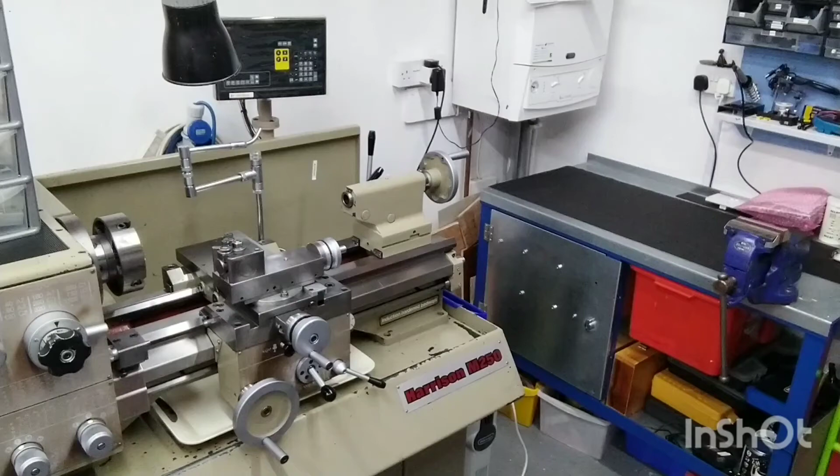It's Carl. Just having a nice brew out of my brand new lovely cup. Wild cinnamon and apple. Very nice.

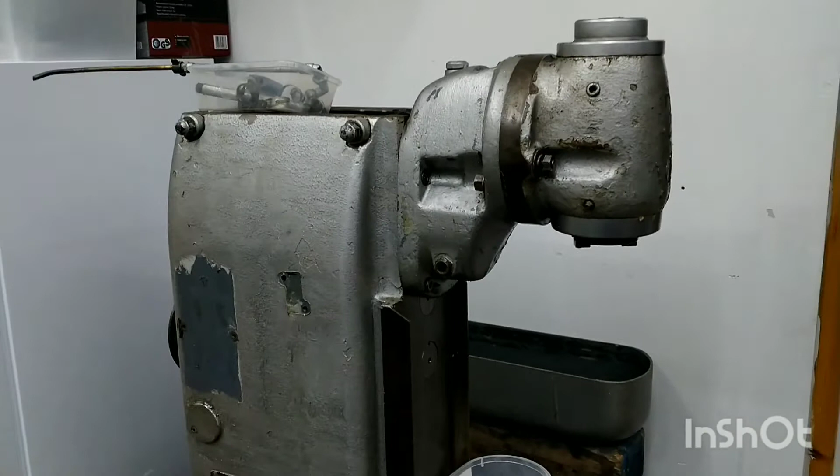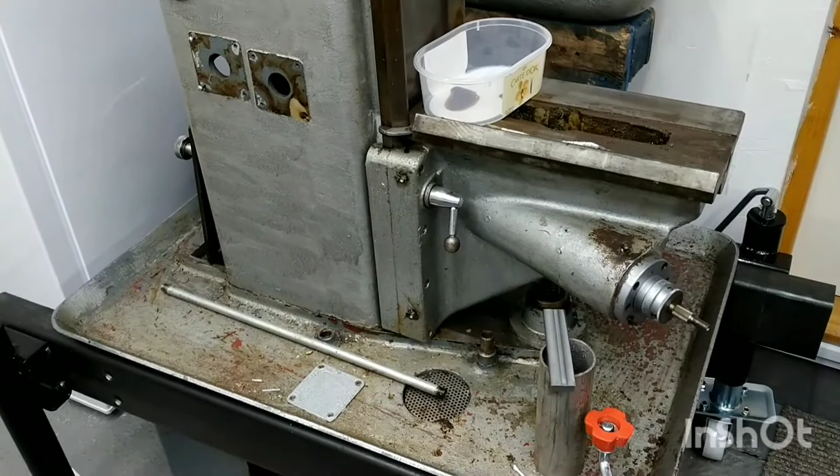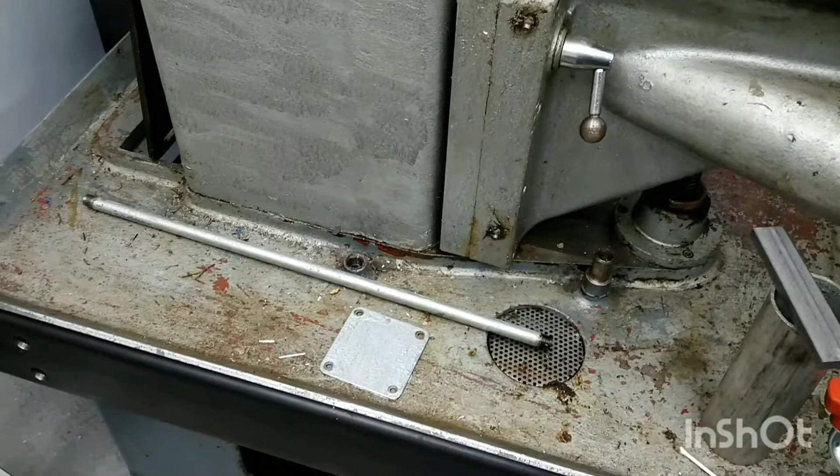So what I've been doing today is doing some preliminary work on dismantling further the milling machine, and I want to show you now some of the bits and pieces that I'm going to be working on and some of the vagaries of this 50-odd-year-old beast. So what I've just done here is I've taken off the coolant pipe. You can see a piece of it down there, and it's just brass with BSP thread run into the ends and then screwed into the various components.

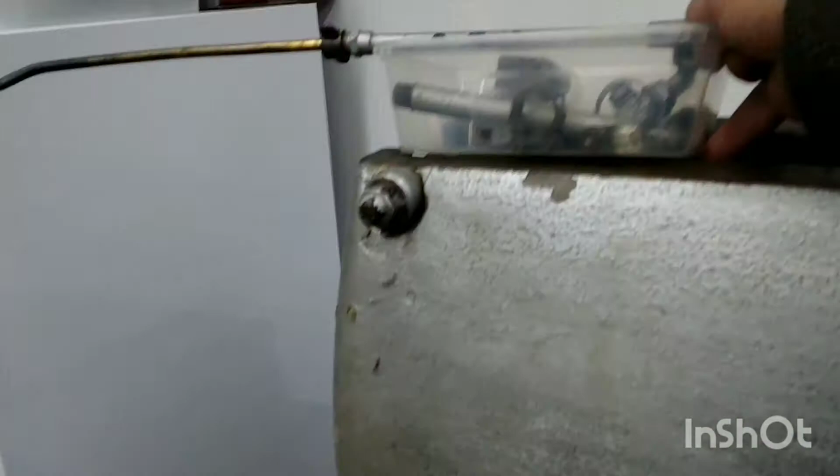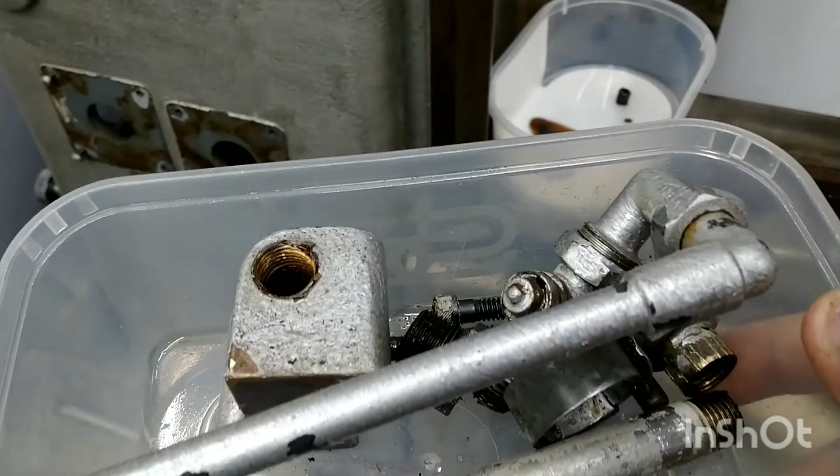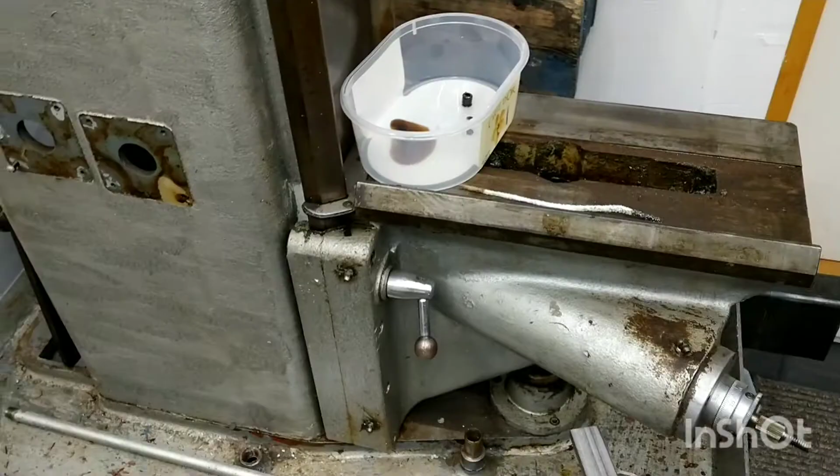So here we've got a box with lots of bits in it. That brass block fits onto, well, you can see where it goes there in the shoddy paint job that's on this thing, and that brass block has threaded into it this quarter turn valve that you can see here, and various other bits and pieces screwed together to make up the coolant pipe that runs up the side and then feeds onto the work table. So we'll put that over here for the time being.

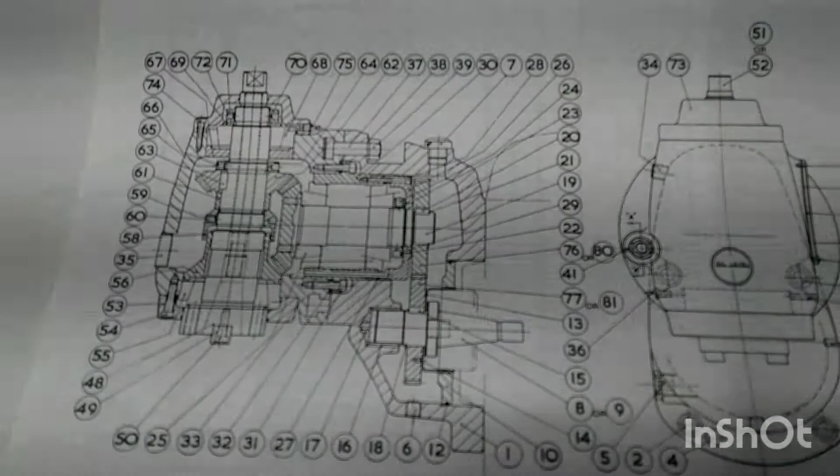Now I just want to show you this drawing here. This is the manual that I think I've shown you before, and I've just been doing some preliminary work. Here's my first best scriber, second best pointer. I've just removed this 8th BSP plug here from the base of the vertical head because I'm going to take that off next. It's the next big assembly that I want to remove.

So here is the vertical attachment. Handheld again, so the usual disclaimer.

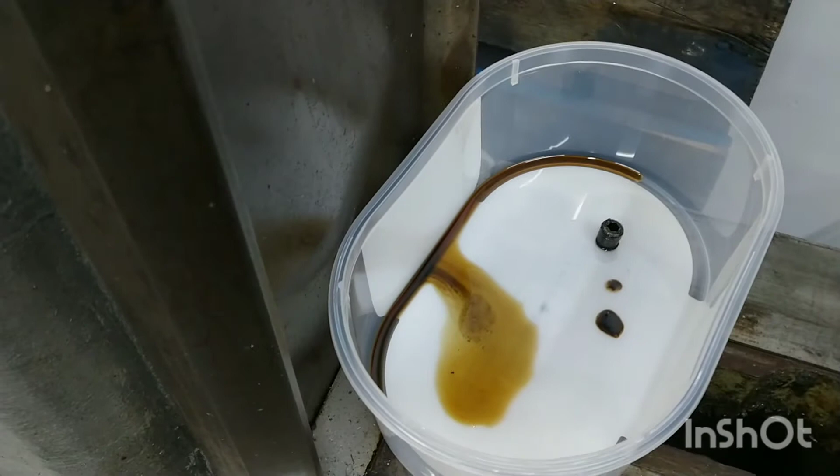So as I said, I have removed the offending 8th BSP oil plug from the base of the attachment and drained all the oil out. That's how much was in it. Not very much at all. Now that's supposed to be Shell Vitrea 27, which according to my research has been replaced by a Shell ISO 37, Tellus 37. Vitrea is a pre-ISO designation.

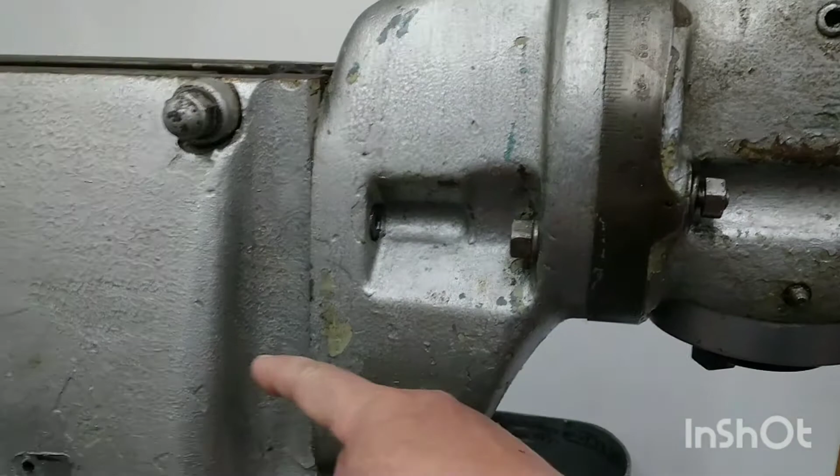Now that's supposed to be an anti-wear oil, and it smells like a gear oil to me, and it looks a lot thicker than I would imagine a 37 to be, but you know, if that's what it's supposed to be, then I guess that's it. So inside this part here, there is basically just a geared transfer from the driving feature of the spindle of the machine proper up to here, to where we have then a set of bevel gears in here, and I'll show you that on the drawing in a minute.

So I think I'm going to have to use the engine crane to get this off, much as I dislike using it in here. This is going to be a heavy lump, it's cast, and there's a lot of gearing and bearings and things like that inside it, so I don't fancy my chances.

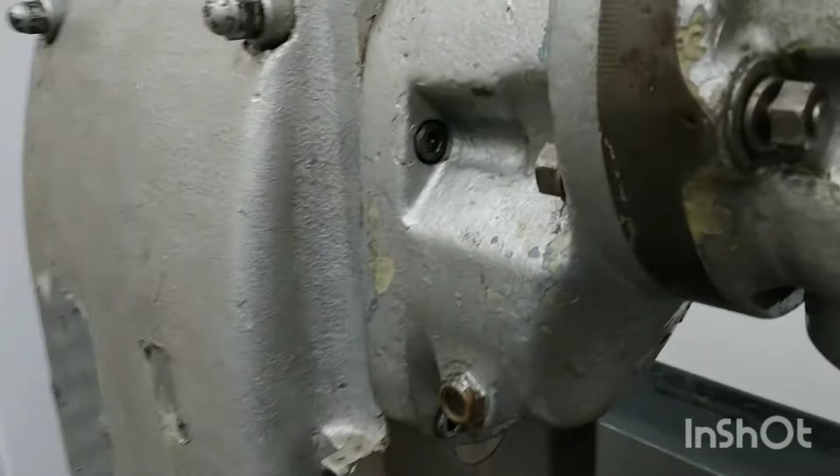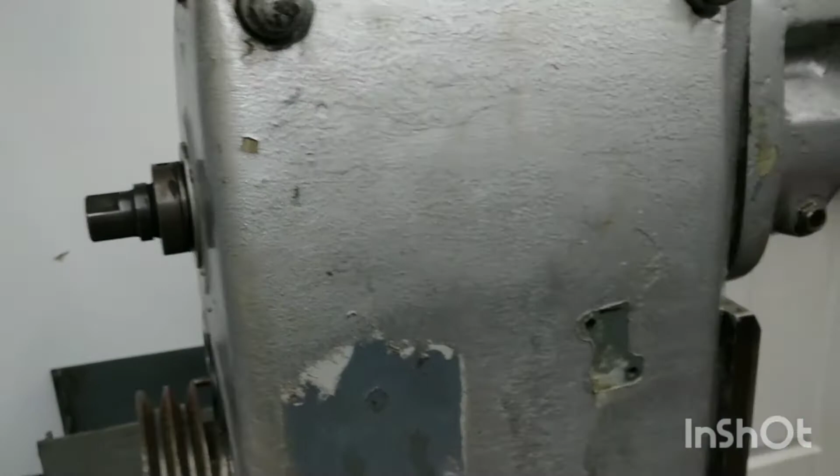You can see here, on each side there's two SHCS UNC screws, there's two on the other side. Take those two out and then remove this drawbar at the rear here, which is only hand tight at the moment, and then the unit itself, the vertical head, should pull off the ISO 30 taper that's in the spindle in the driving feature, and then we can get that off.

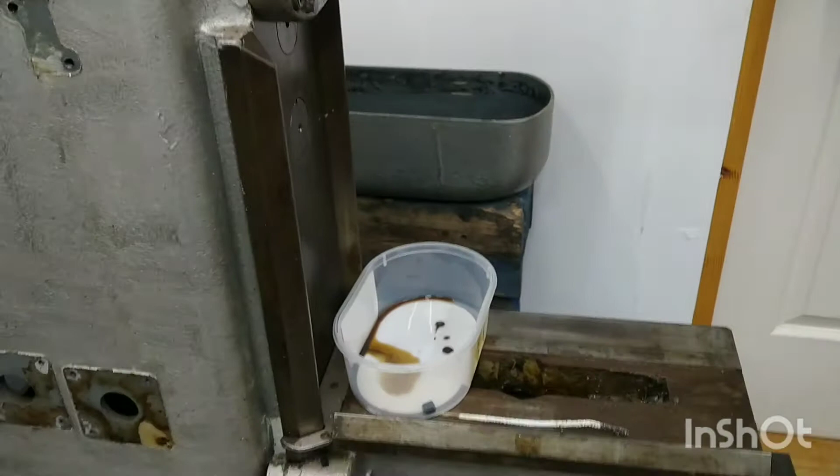Now as I say, I'm going to use the engine crane to do that because I don't really want to drop it onto the ways, which I know they don't look great on the knee there, but it's mostly cosmetic. I think that's sort of the state of them at the minute. So I'll show you the drawing now, and you can see how this thing works.

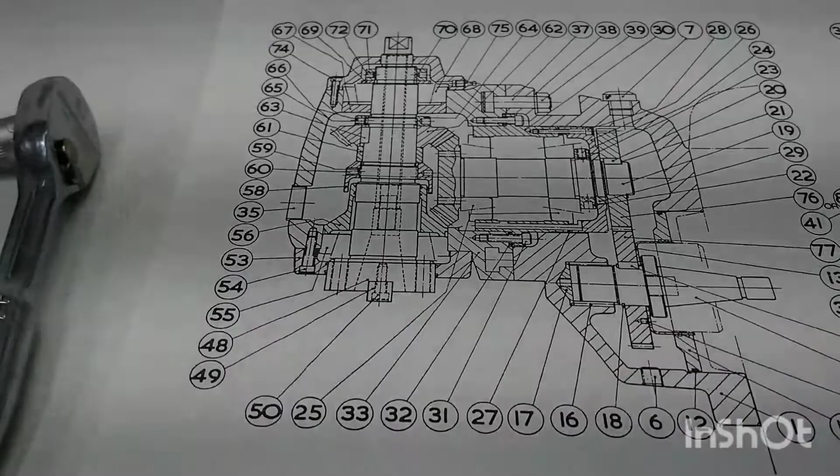So here is the drawing that I have of the vertical attachment. Excuse the quarter drive ratchet handle there, I just left it in for authenticity. So you can see here what I was talking about. There's the plug that I removed, the 1/8 BSP plug, to drain the oil out of the unit, out of this part of the unit at any rate.

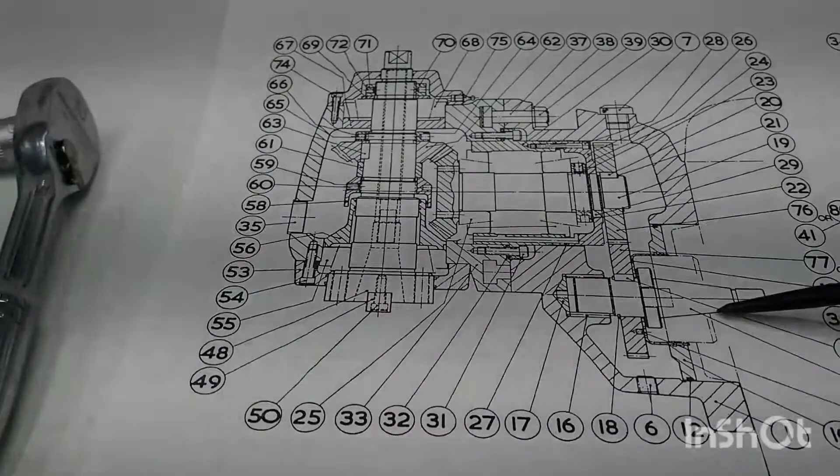So we have on the right hand side here this stub shaft, which has an ISO 30 feature on it that goes into the driving feature of the spindle. And then we have these two gears to transfer the drive up to this level, which then goes into this portion of the unit, which is bolted on with these T-bolts that allow you to swivel the head itself.

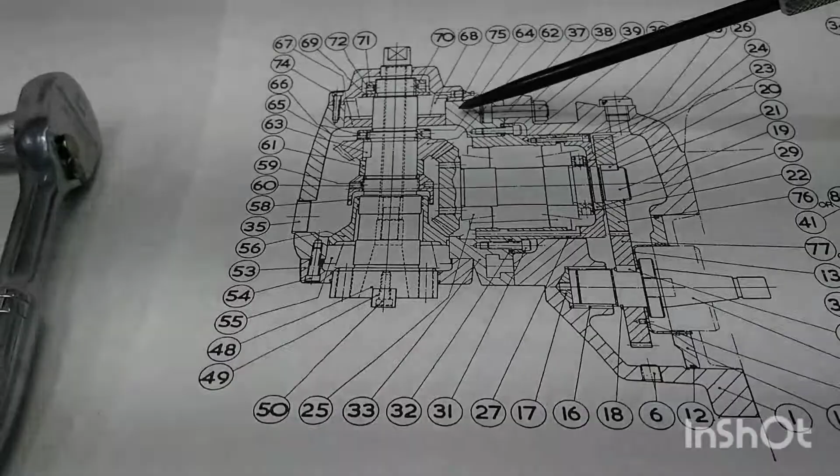And there's a dowel which you use to maintain tram if you do move it away from 90 degrees to some other angle, you can reposition it with a dowel. I'll show you that in a minute.

So these two gears here obviously then drive up through this shaft, and then you've got these bevels or mitre arrangement, and then in here are the bearings for the spindle itself, the milling spindle, which has an ISO 30 feature in it, and this drawbar here, a short drawbar, which is to pull in the chuck or the collet or whatever you fit into here to drive the tool.

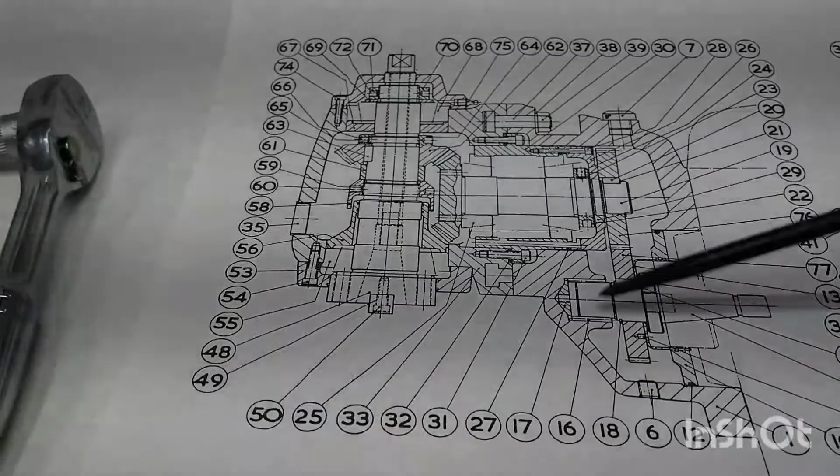So these gears in the low speed version, they're both 51 teeth, so it gives a one-to-one drive through here. And then in the high speed version, that gives an increased drive, so the bottom one is a 66 tooth and the top one is a 36 tooth, so it gears up the drive basically to increase the speed. Now I'm just going to give you some figures for what that is.

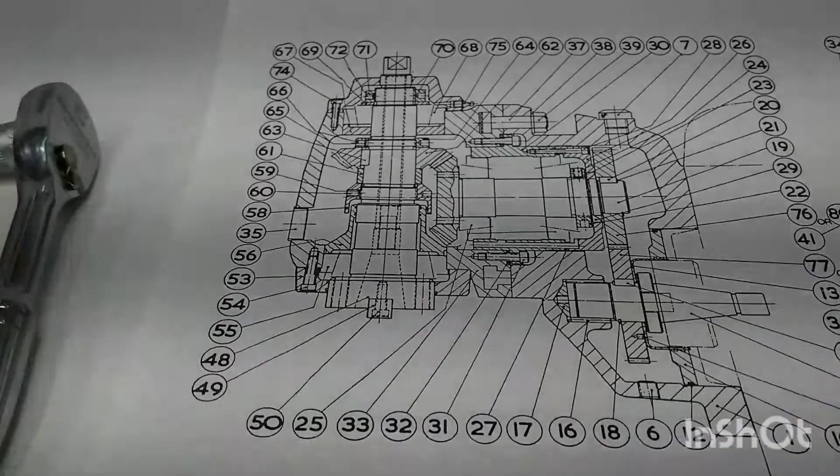Just give me one second. Yeah, so the high speed is about 120 to 2750 RPM, and the low speed is something like 82 to 1850, I believe, is the difference in speeds for that. So we'll go back to the head now, and we'll have a look at some more features, and I'll show you the dowel.

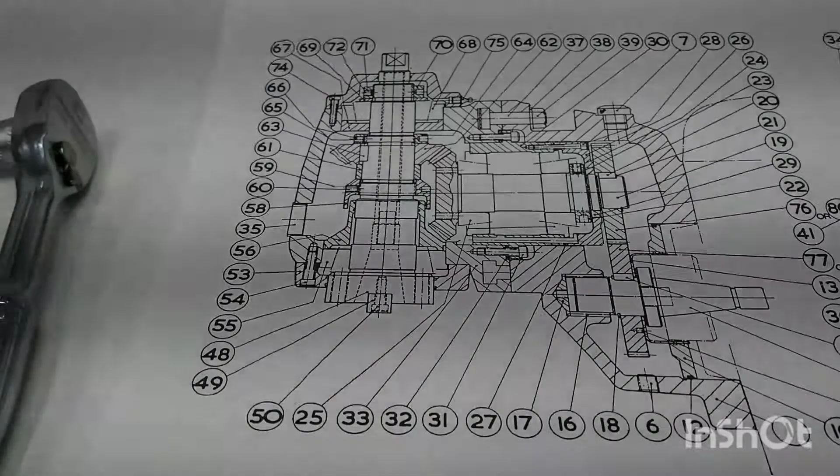So this is the dowel I was just referring to. It's a tapered pin with a thread on the end and a nut, and kind of counterintuitively, if you want to remove this, you tighten this nut up and it pulls the pin out, and I'll show you that now. There is some damage on this which I'll give you a peek at.

So I'll just get my... I've drunk my brew, that's no good.

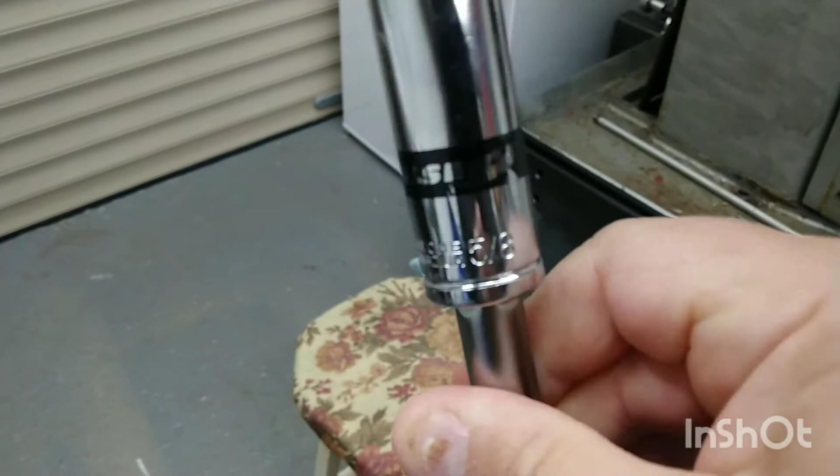Let's get this, what have we got here. Yeah, what size is that? Just show you, 5/8 AF. So we'll get that on there. Now I've had this out already, so it should come out relatively easily if I turn it the right way. Right, I think it's going to pop out now. No, let's keep going, give it a go. Yep, there we go, that's got it loose.

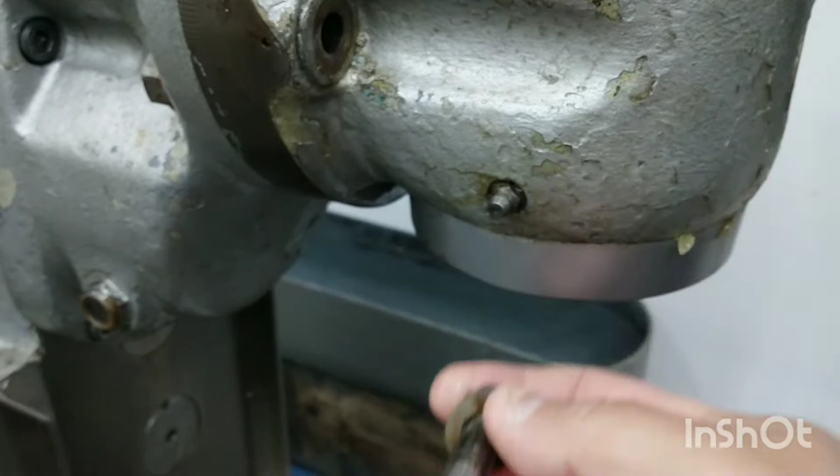Right, so there you go, one taper pin, which doesn't seem to have any scoring or damage on it, despite that line that you can see there. I think that's just in the grease. Now, what you're supposed to do with this is when you put it back in, you're meant to undo the nut so that it's right at the top and protects the threads, and then tap it back into engagement.

And I think someone's just been hitting the thread. When I first saw this, I thought someone had tried to pin it, to lock it in some way, but I don't think that's the case. I think someone's just been a bit too free with the tapping stick. So we'll have to clean that up before that goes back together.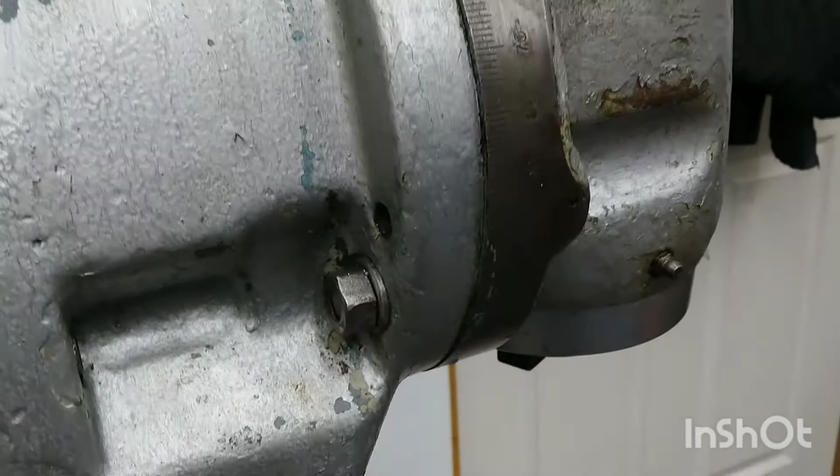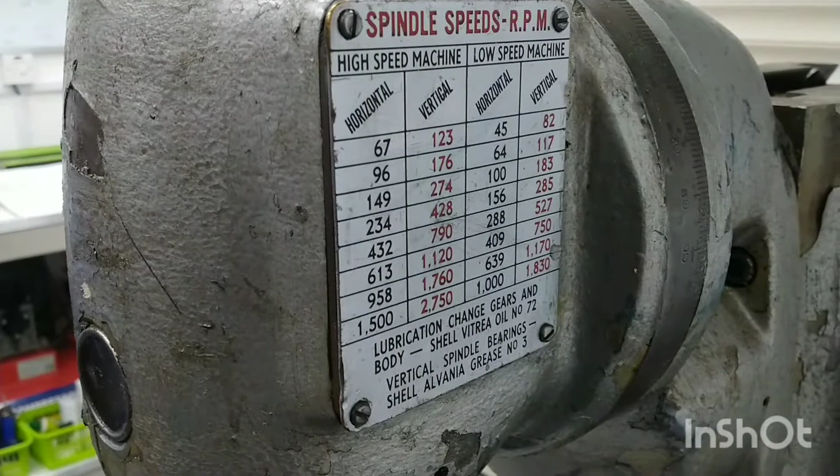So these are the T-bolts I was talking about that allow this head to swivel round once you've removed the taper pin, and there's graduations on here. You can move it, I think it's 45 degrees either side of vertical, and so that allows you to swivel it around. And then we've got a plaque on the side here that gives the speeds for if it's a high speed or a low speed machine, or head I should say.

I don't actually know what this is. And when I take it apart and look at the gears in the transfer portion, the transfer gearbox if you like, in here, that transfers the drive from the driving feature up into the bevels, I'll be able to tell you what that is more definitively.

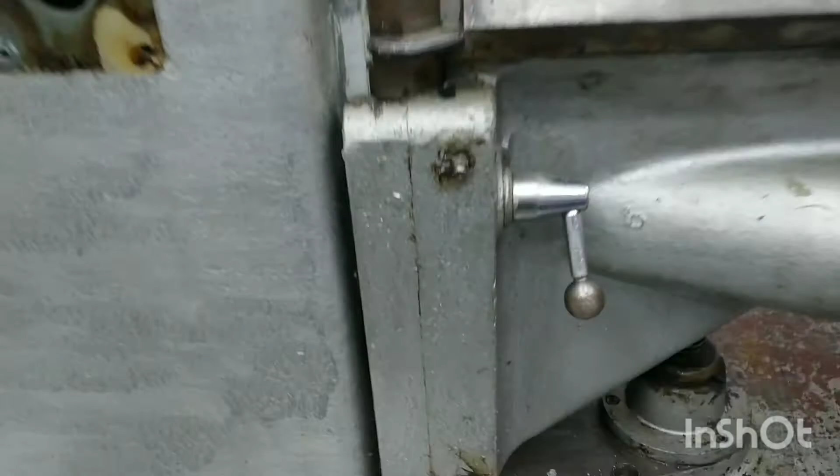So I'm going to show you some more bits and pieces now. We'll have a look at the knee, and we'll have a look at the knee lead screw and the lead nut and the nut housing. So this knee is attached onto the vertical guides or vertical ways here by this clamping arrangement.

Now, I've read up on this, and there's not much information online from other users about these machines. So I'm hoping this is going to become a bit of a repository of information, and my mistakes will help other people to refurbish these machines.

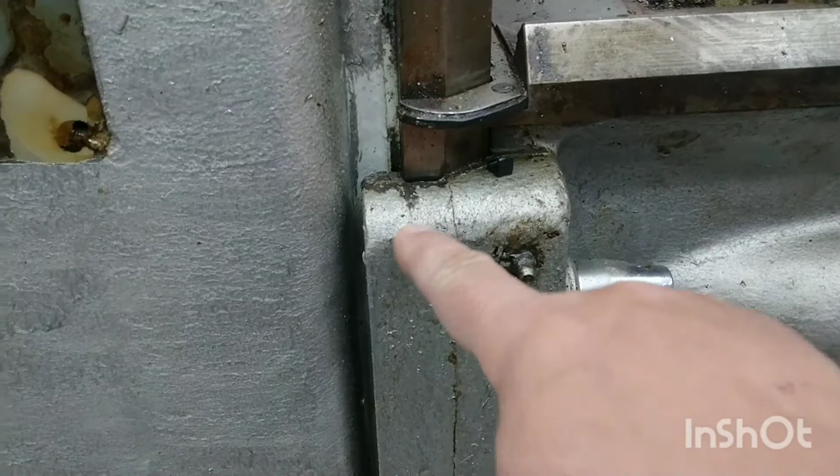This clamping arrangement here, which you can see at the front, has 4 SHCS holding that on, and then you've got the lock here as well. This doesn't have any gib strip in it at all, and I'm told, or I've read, that there are shims in this gap to set up the clearance or the fit between the clamp and the ways there, or the running faces here.

And I'm kind of loath to take this apart, but I think I'm going to have to get this off just to clean it up really, and even just to paint it. And I think nothing ventured, nothing gained. I think I'm going to try and split this apart and take this off. If it's shimmed in there, then it might be difficult to get the clearances right, but you know, there are ways and means of going about these things, and I think we'll have a go at it.

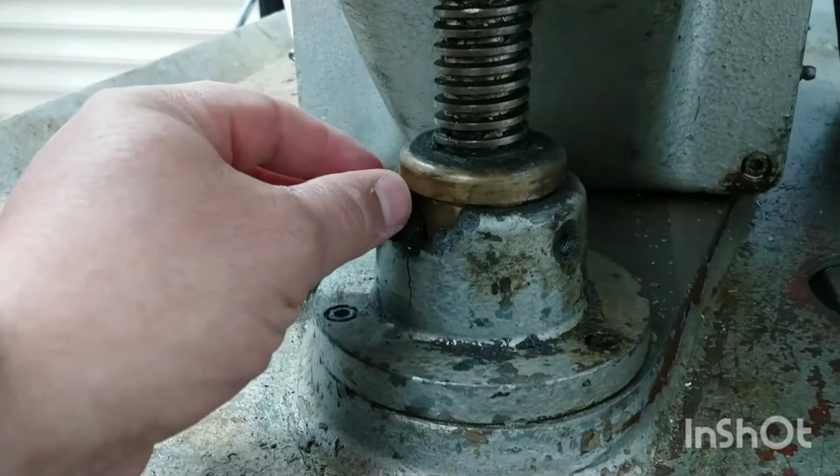So the thing I want to show you now is one of the parts I'm going to have to manufacture for this machine on the lathe, the lead nut housing. As you can see, it's cast iron, and a fairly substantial crack here has led to this damage. So there was a lubrication nipple in here, and obviously the crack's propagated from the threads. They've been the stress raiser that's caused this crack.

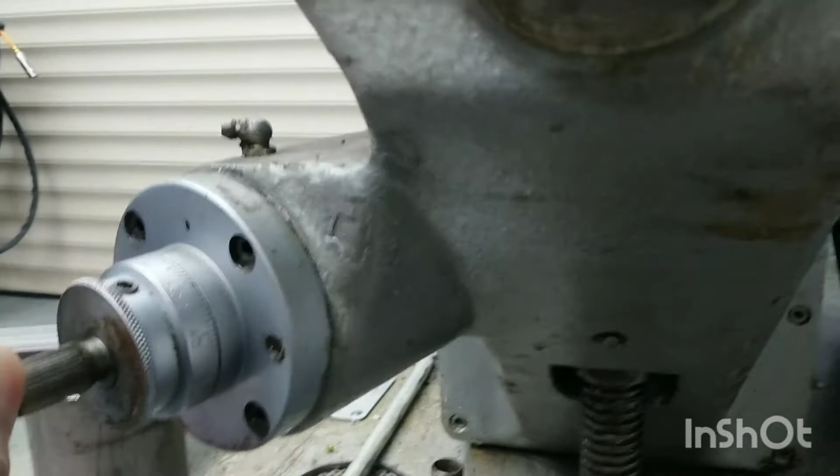So that's got to come off and get measured up and have a new one manufactured. There is another crack in it as well, around 180 round from this one. So that lead screw has to come out, and the operating mechanism with the skew gears inside here, inside the knee. You can see how filthy that is in there. It's just years of basically grease and swarf and other detritus that's managed to work its way into there, so that's all got to come apart as well.

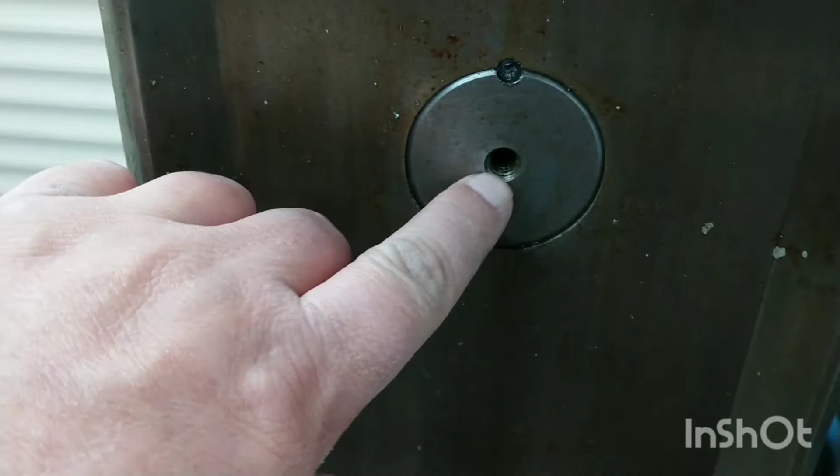And another thing I want to do is, I kind of was going to leave the gearbox alone, but I am going to strip it down and replace all the bearings. And I've got these caps here. You can see that there's a thread in that hole, and then there's a locking grub screw on the periphery, so I can actually thread something into there to pull these caps out, which are the bearing caps. Inside there, there's a bearing for one of the shafts in the gearbox, and I'm going to make a simple puller to get these out on the lathe.

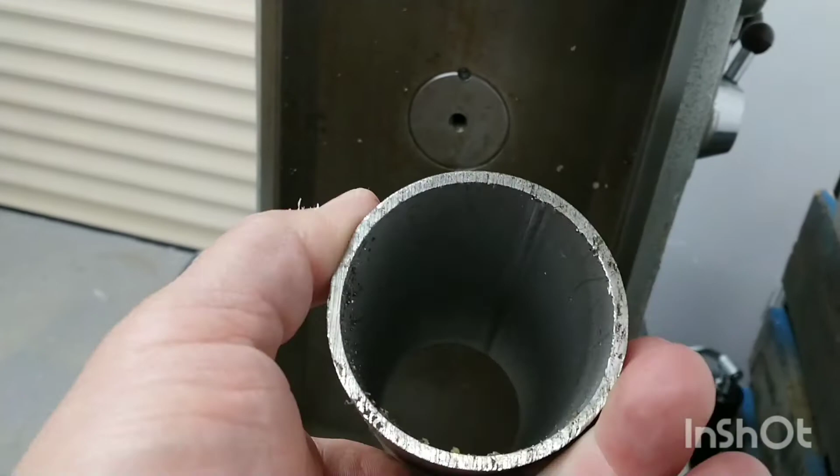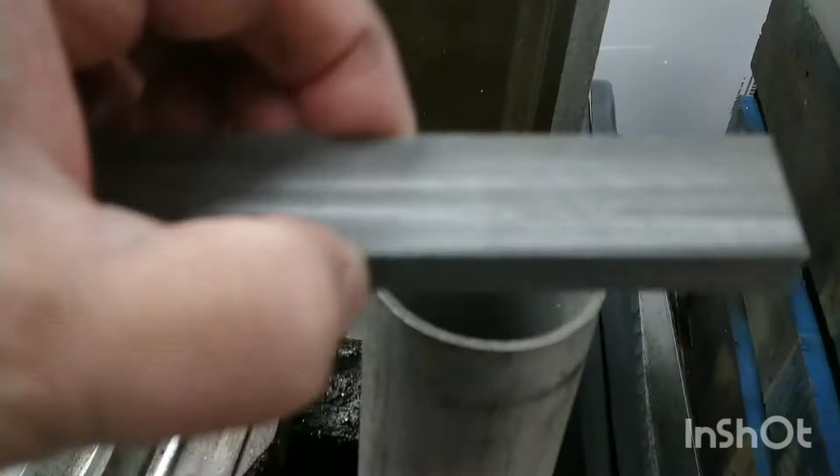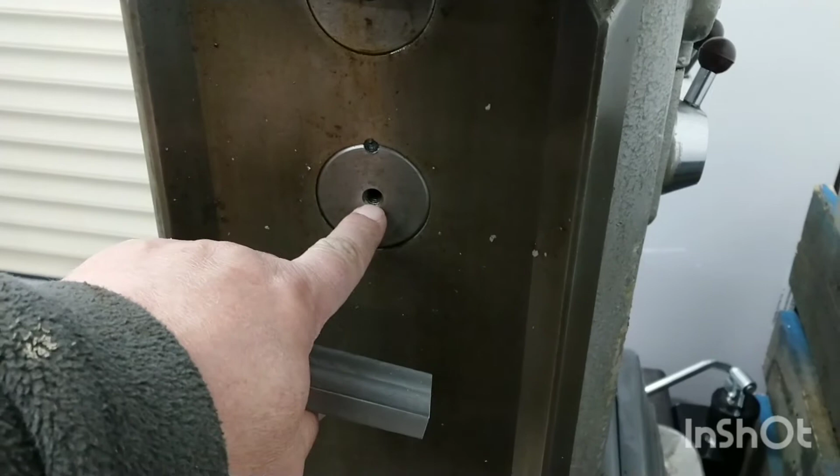So basically what I've got here, I'll show you now, is some nominal bore hydraulic pipe which fits over the cap, and I can cut a piece of that, and then take a piece of flat bar, weld it across there, and then I'll drill a hole in it, put a piece of threaded rod through with a machined end with the thread that's in there. I'm not sure what it is. It's a UNC. I think it's probably quarter UNC or maybe slightly bigger. And then we'll be able to make a puller to get that out.

It does seem a little bit overkill. I know you'd probably say, why don't you use a big socket? I haven't got a socket big enough, but I have got a lathe and a TIG welder, so I can make something up. Which makes all the difference, actually, I think. Being able to make just ad hoc one-off tools to do jobs like this, it's just a little bit more professional, and it makes the job go much more smoothly, I think.

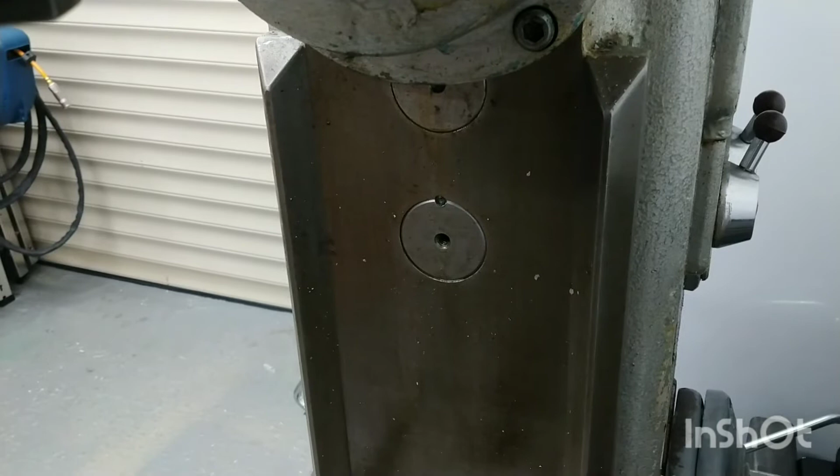You can see where we're at today, or it is a different day. We've now got the engine crane in position to lift the vertical head off the machine. I got it slung here with a couple of 1 ton strops, overkill, but there you go. We've got one doubled up around it, the other one's basketed through and on the hook. So we're going to take the weight using the engine crane, the dreaded thing that I don't really like using in here because there isn't an awful lot of space, but I haven't got any choice to get this off.

We'll take a little bit of weight off this and we'll take the 4 SHCS screws out and we'll get this off. So now you've seen the arrangement, I'll bring you in a bit closer and we'll get this beast off. So here we are, slung as I mentioned to you before, on the engine crane. This sling's twice round and then this one's through the eyes and then into the hook.

So this is held on with 4 7/16 UNC SHCS screws. I've taken the top one on each side out already, so that obviously once I've got the sling on I can't actually access them, so I've taken them out prior to slinging it up. So it's now being held on by these 2 at the bottom, the 2 7/16, and also by the drawbar that's going through into the driving feature, the ISO 30 feature in the back of the transfer box.

So here we go, there's a 5/16 AF socketed Allen key. We'll get these 2 7/16 out of the bottom of the unit itself, the vertical head. Put them in there, get this one out. There is some kind of a dowel here in this position, hard to see I know, but I'll show you it shortly. We'll get this one out and then we'll try and see if we can get any movement on this. Now there should not be anything holding it now. I can see there's a slight gap starting to open up at the side.

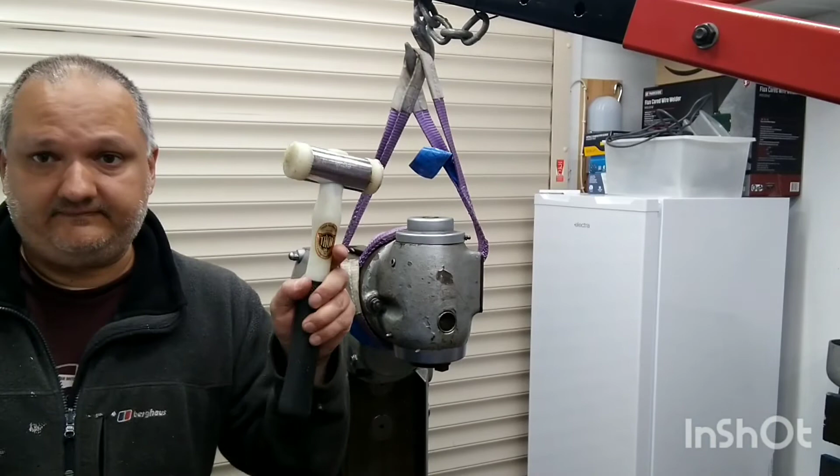Let's just see if we can get any movement with the old Thor. Yes, I am Thor, I better put some cream on it.

Okay, so, right, gap's opening up, so it has definitely opened up there. There's a little bit of weight on this, not much. Oh, I've got some movement there, that's good. That means something, doesn't it? Right, let's undo the drawbar and see if this is going to come off. So that's the drawbar out. Put that somewhere safe, we'll put it on the bench for now.

Right, I'm going to give this a tap. Right, that's definitely pulling away from the driving feature. So I don't want this to fall off onto the ways. Right, I'm going to show you what's in here now, because there's definitely a locating feature there as well. So I'm going to bring you in on the small tripod. That's what we'll do next.

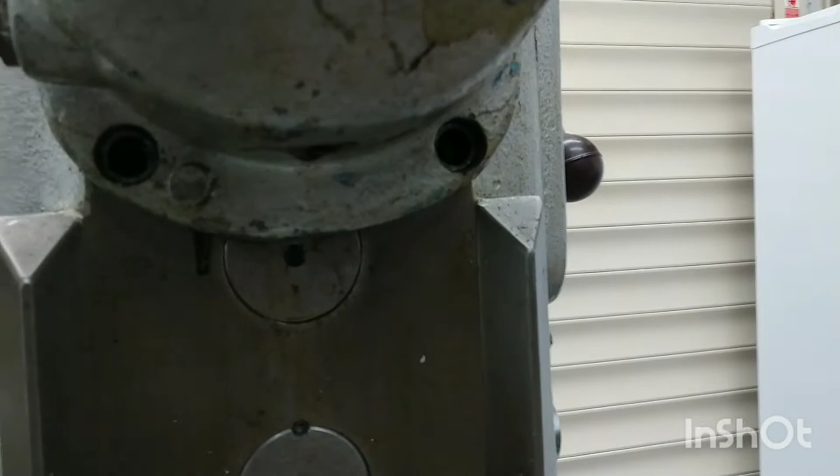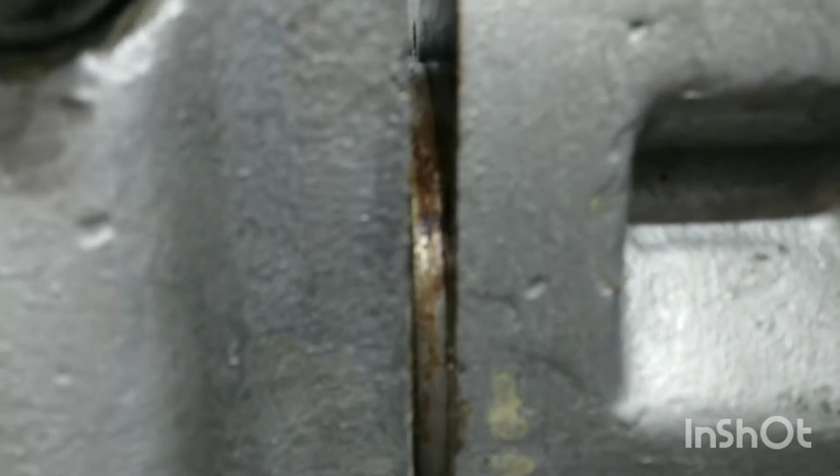So that's me brought you in on the handheld. You can see there the dowel, or whatever it is I was talking about. It looks like it could be a dowel. You can see where I've removed those 2 7/16 UNC bolts. Now coming around the side, you can see the gap is starting to open up and the head's coming off. Inside there is a locating feature. You can see that there, that ring.

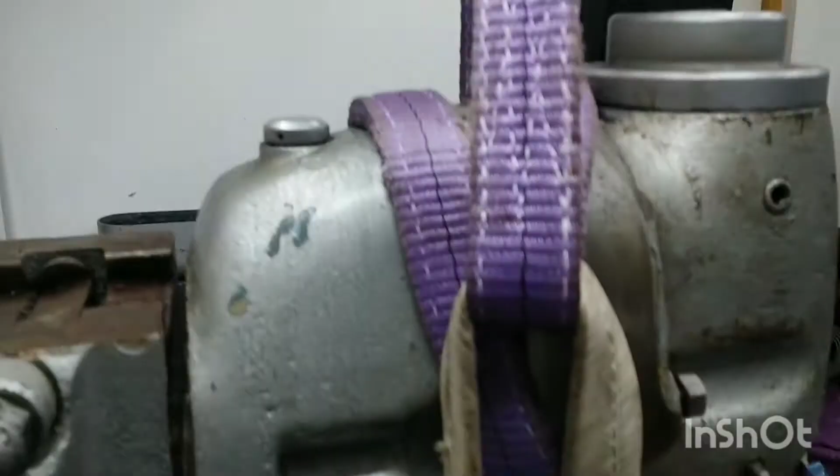So we'll carry on. We'll get you back on the tripod because I want both hands free for taking this off. There is some load on the sling. I don't want to load it too much because I don't want to jam it up on the locating feature or on the driving feature. So I'm just going to leave it like that at the moment. And this is slung in such a way, the way this is doubled round, that the vertical head won't slide out of that slinging arrangement. But once I've got this off, I'll get it down onto the deck as soon as I can.

But I'll transfer you back to the big tripod, so I've got both hands free, and we'll carry on with the operation. Okay, that's you guys back on the big tripod again. So I'm now going to remove the vertical head away from the machine body, which may take some doing because this engine crane is perhaps not the most manoeuvrable of things. Right, this is starting to come off now.

I think I'm going to take a bit more weight. That's definitely moving. Yeah, I'm going to take some more weight on the crane, I think, because I really don't want that dropping onto those ways. So you can still see what I'm doing. I'll just get a bit of weight on the crane and also observe the head and see what it actually does when it's got a bit. Right. Yeah. Oh, yeah. We're off.

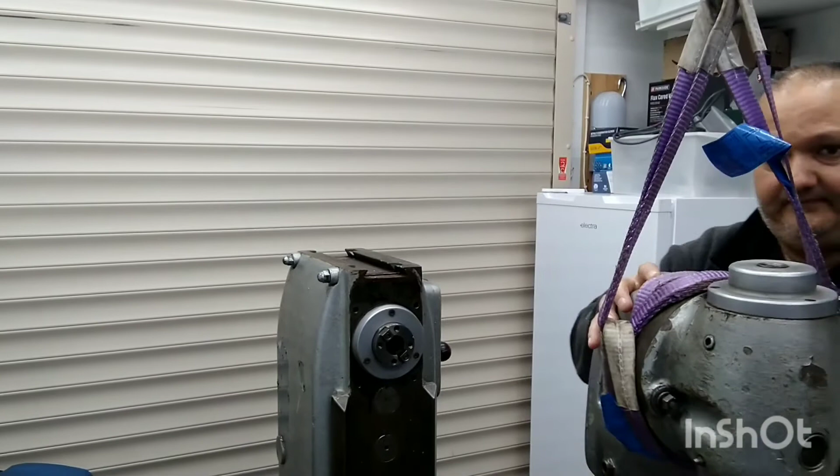Right. That's the ISO 30 taper just come out there now in the stub shaft. So I'm going to put you on the small... in fact, no, I'm not. I'm going to pull this back, get it out of the way of the machine, and then I can show you properly what we've got. That's actually quite nicely balanced. Quite pleased with that. Let's get it away from those ways, and then we'll have a look at what we've got with it suspended from the crane, because it's not going to go anywhere. Right. Okay, I'll put you on the small tripod and we'll have a look at what we've got.

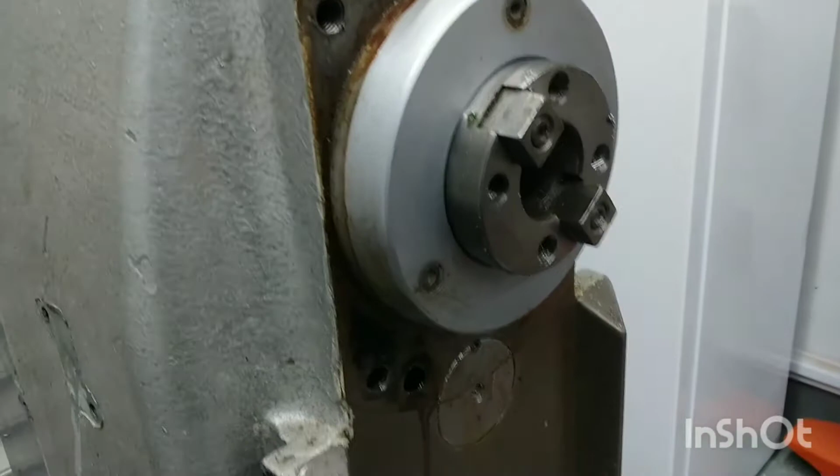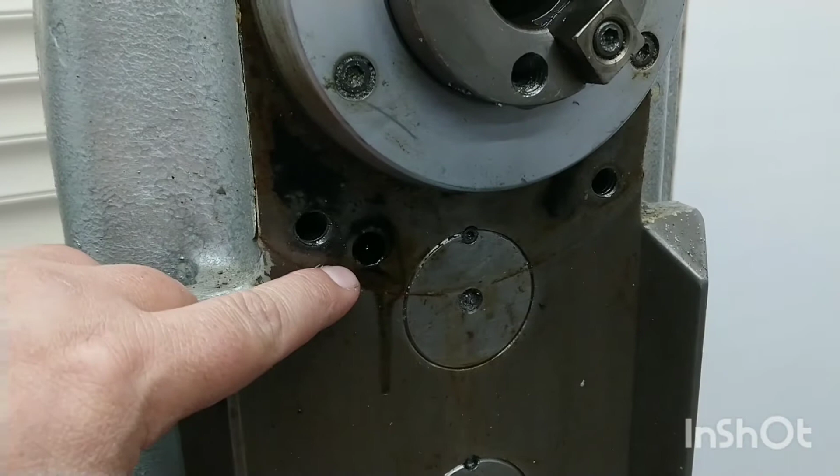Right, so that's you back on the small tripod and handheld. So here is the driving feature, the ISO 30 fitting, which would have the horizontal milling arbor fitted into it normally. And you can see here there's a locating hole where the dowel that I was talking about went into, and then you've got the four 7/16 UNC threaded holes that hold on the vertical head. And this is the locating feature I was talking about, which is actually the bearing cap for this end of the driving feature, for the horizontal side of things.

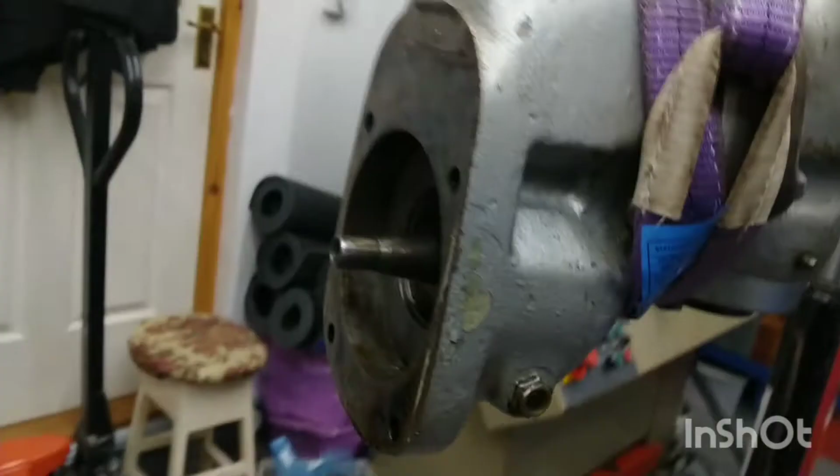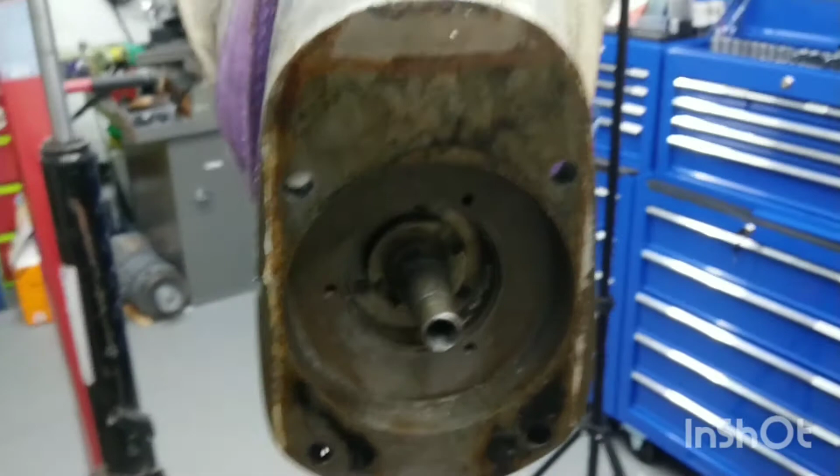So now we'll spin you around. We'll have a look at the vertical attachment. So that's nicely balanced on there. Actually, I'm quite pleased with that. I was a little bit worried that it was going to fall over or it was going to tip, but thankfully not. So if we go around the other side of the vertical attachment, okay, there's the mating face. This is where it locates onto the bearing housing, which is the locating feature on the driving side, the horizontal arbor side.

Here is the ISO 30 stub shaft that I talked about on the drawing, and that's not coming out. I think that's got a circlip or something on the other side of that stub shaft. Anyway, on the other side of that is a 51 tooth gear. So we'll get into this in more detail later on when we come to strip it down. But that's what we've got in there so far. We've got an ISO 30 stub shaft, and that engages on that ISO 30 driving feature.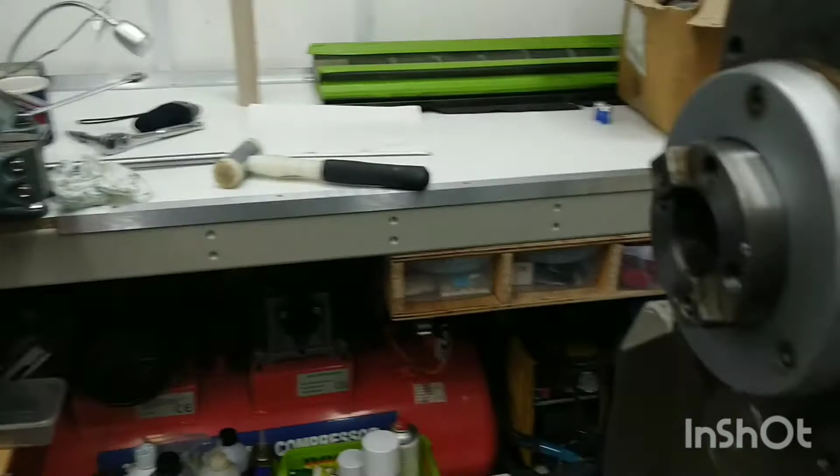So that was a lot less painful than I thought it was going to be, extracting that vertical head. So I'm really pleased I've got that off now, and I can start looking at the strip down of the gearbox, because you can see there this bearing cap here for the gearbox was partially obscured by the vertical head, so that had to come off before any further strip of the gearbox could take place.

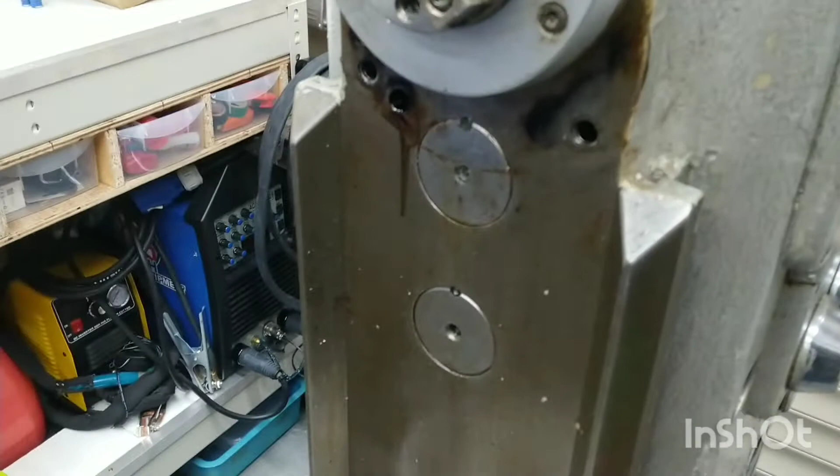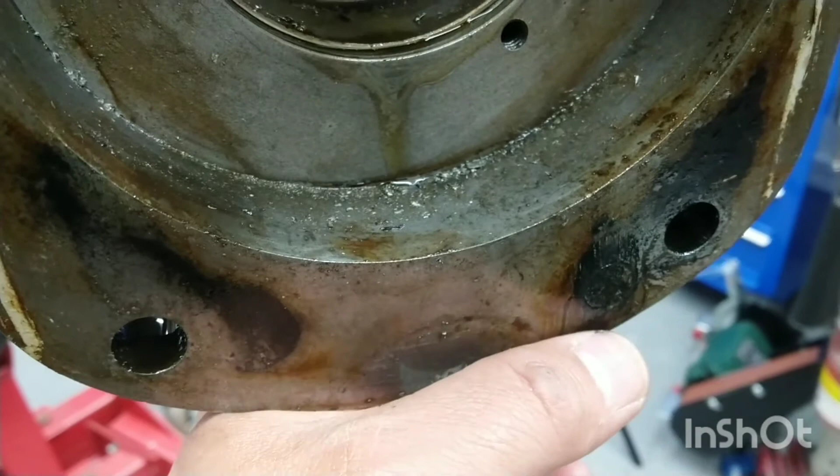And I'm just looking, actually, the dowel I was talking about is recessed. So I'm not too sure what's going on with that, because there is definitely a corresponding bore there for that dowel to engage with. So we'll maybe have to have a look at that as well at some point in the future when we start stripping down the vertical head and examining the parts inside it. See what's going on with that dowel. Right. That's a good job done. I'll now get this thing down to terra firma and get it housed in a nice box. Keep it out of the way until we get the chance to do some more work on it.

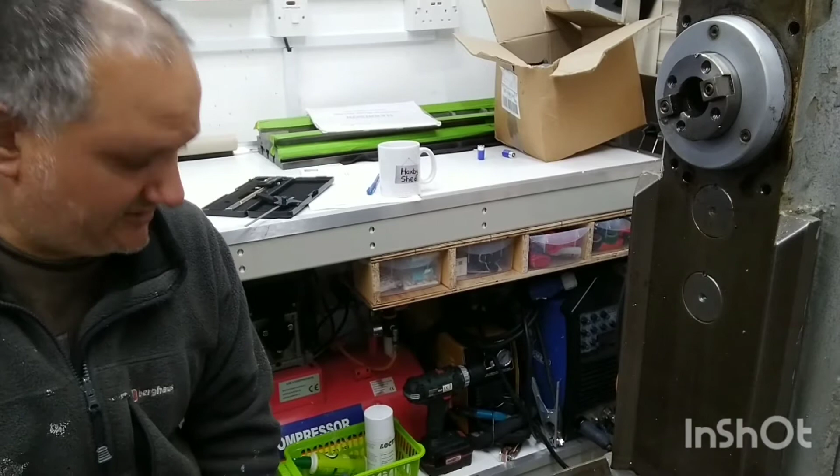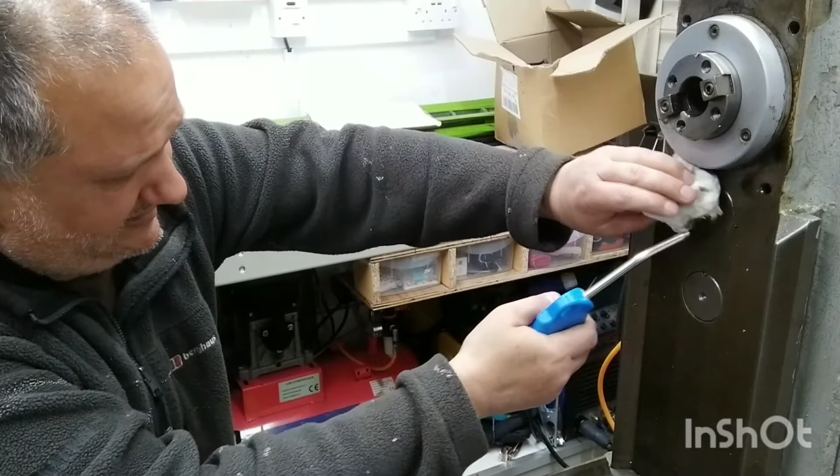So you find me just spending some time cleaning out the threads in these plugs so that I can get some measurements and get some dimensions to make a puller for them to get them out. So I've just been basically blowing them out with compressed air, because like everything else they're absolutely full of grease and swarf. I'm giving it a spray with some aerosol solvent as well.

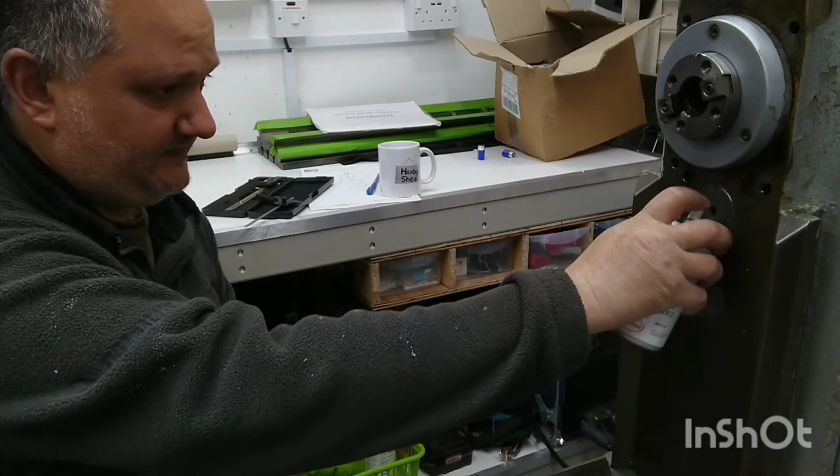Now, I spent a lot of time on the saddle and the table of this machine cleaning out all the grease, all the lubrication lines, the oil lines, cleaning out all the grease from them because they were absolutely chock-a-block with grease. So that was a long protracted process with pipe cleaners and blowing them out with compressed air, chasing them out with acetone or solvent. But in the end, I managed to get it all out.

So I'll have a look. I'll put a tap down these threads. As I said, they are 5/16 18 UNC. Everything on this machine is either UNF or UNC, so it's all unified. So that seems clear enough in there now. And let's try this one. Yeah, just getting all the swarf out of it, all the dirt and grease. Right, that's good.

So I'm just going to try and measure the depth of the thread in there pretty roughly, just using this little depth gauge. It doesn't have to be that accurate. It's only going to be for a puller, and let's use the level of accuracy that the task dictates. So that is 8mm of thread in there, and about the same on that one as well, I think. Yeah, 8mm of thread, which is okay. It'll get a good hold at that.

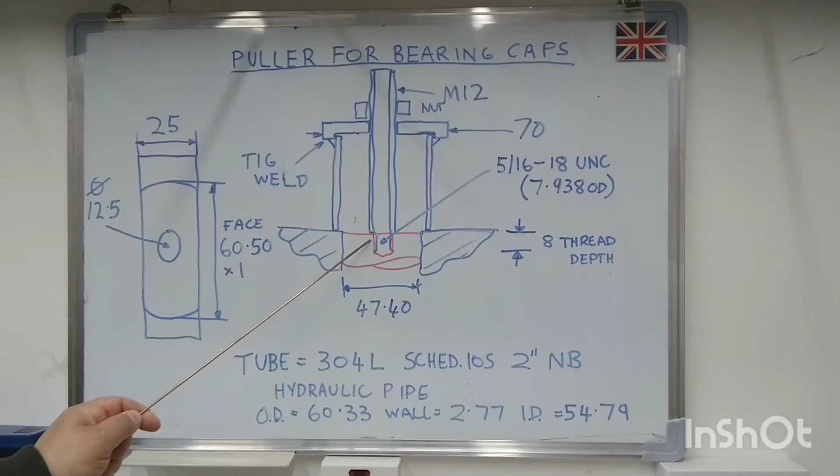So here is a rough sketch, very rough some might say, of the puller that I want to make to extract the bearing caps in my Harrison mill. So here's the bearing cap in red with the thread through the center of it, which is 5/16 18 UNC, and I took a slightly more accurate measurement of it than the one you saw me do, and it's 47.4mm in diameter. So what I want to do is to have a piece of tube like this with a bar welded across, a hole in the center of that bar, and then a piece of M12 threaded rod with the end turned down to 7.938, which is the major diameter of the 5/16 UNC thread.

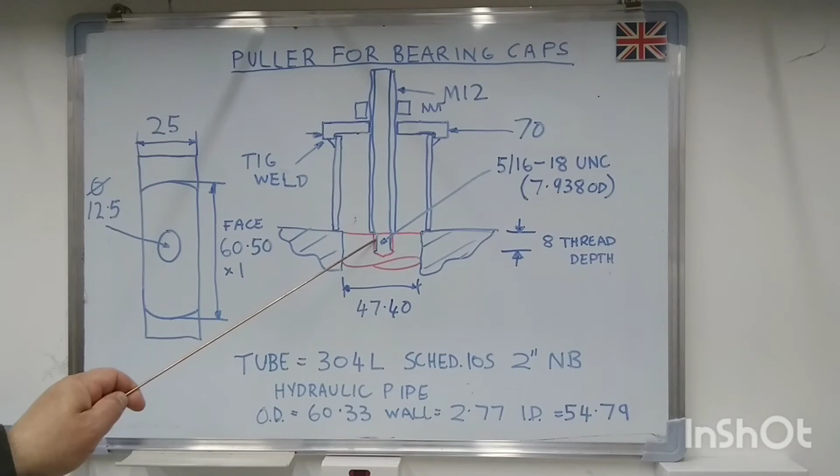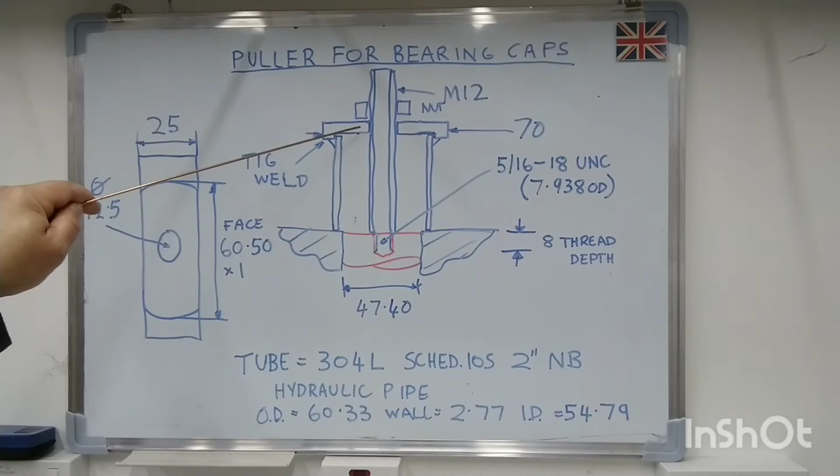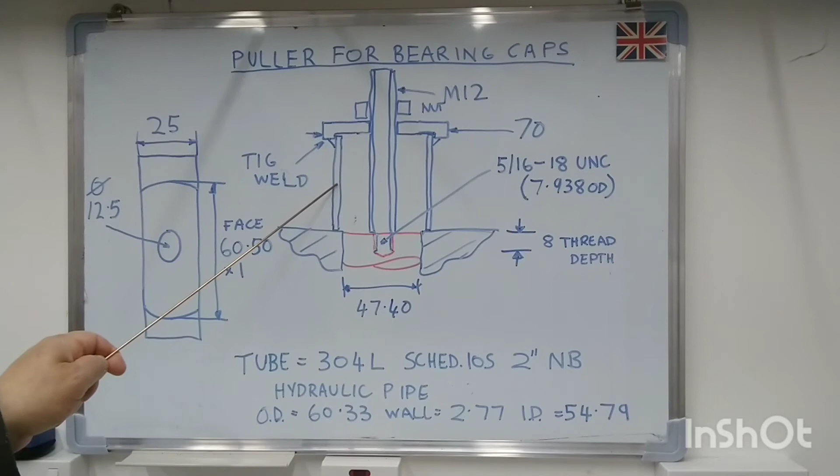And then we'll put a 5/16 UNC thread on that, so we can thread that end into the cap, and then we can put a nut on the other end of this M12 threaded rod, and then by turning the nut that should extract the cap. So what I want to do as well is on this piece of flat bar here, we'll face a 60.5mm wide area, so that this tubing here can recess into that by about 1mm, and that's just to give it some location, a locating feature to weld it when we TIG weld it.

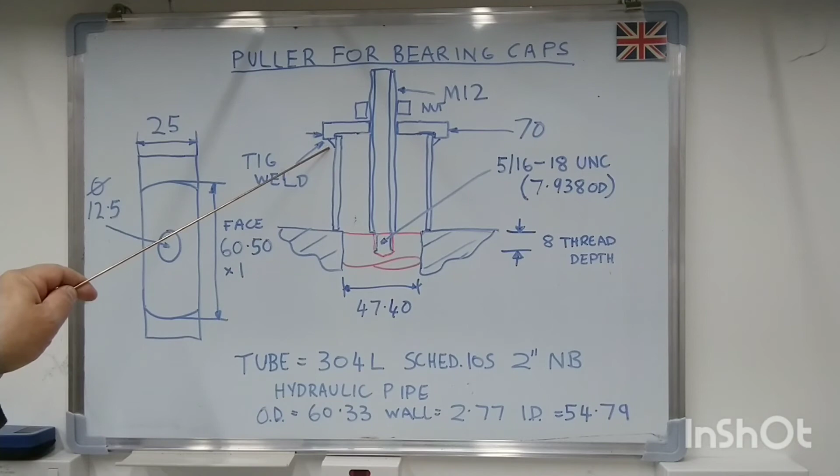The TIG welding actually will be reasonable, but at the end of the day, all of the forces on this thing when it's pulling this out are going to be compressive. So that's actually just to hold it together really. So this bar that I'm going to use is 25mm wide. So we'll chuck this up in the four-jaw. We'll drill the 12.5mm hole through the center. Then we'll do this spot facing of 60.5 by 1.

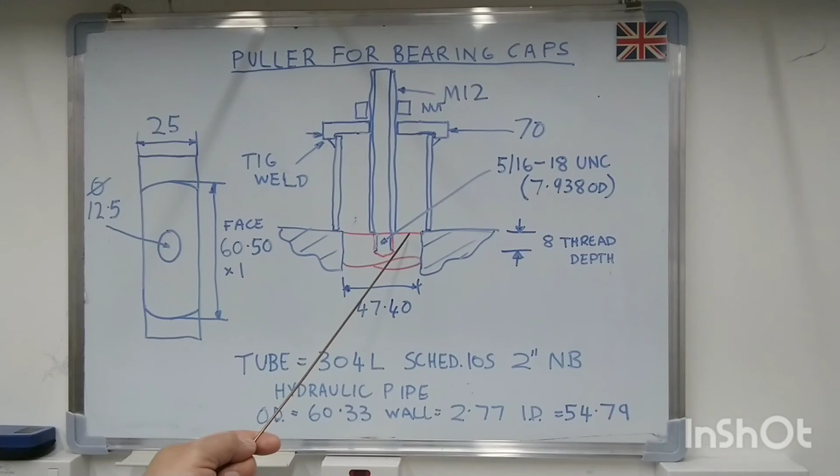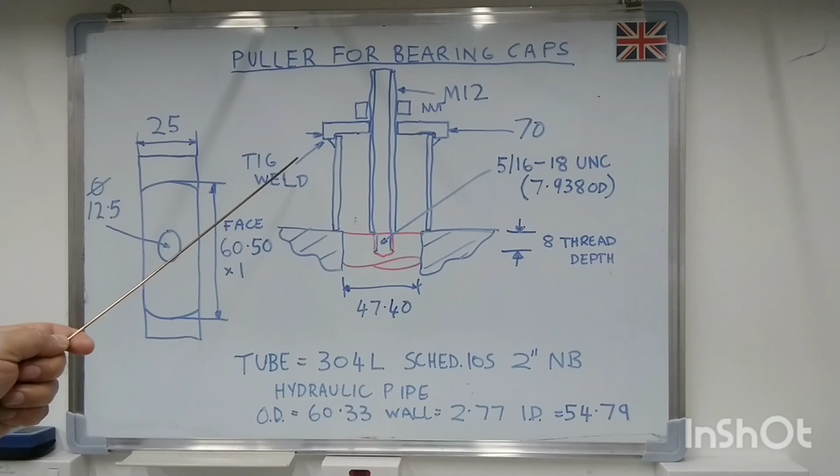Now I'm using 60.5 for this because what I'm using as a tube is 304L Schedule 10S 2-inch nominal bore hydraulic pipe. When you're using nominal bore pipe, you get into all kinds of mixtures of metric and imperial, so we'll keep it metric. The OD is 60.33 millimeters, the wall is 2.77, and the ID is 54.79, so that'll be fine for straddling these plugs. And I'm going to make this spot face 60.5 just so that recesses in there quite nicely, but leaves a bit of leeway for welding it up, so it's not too tight. And I'm hoping that this will do the job. So what we'll do next is we'll have a look at actually making this.